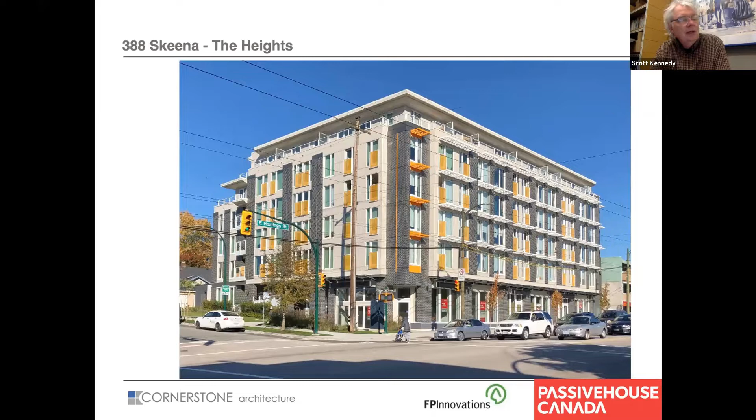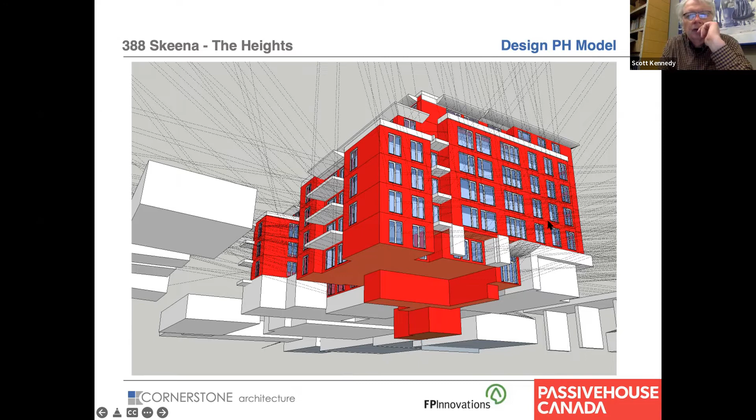So we did an energy model for this project based on a program called Design PH, which is a program developed by the Passive House Institute, and it feeds into a giant Excel spreadsheet, which is called the PHPP. So this model is done to help us enter the data and all the windows and everything else. And down at the bottom here, I think you can see that's the elevator as it goes down into the parkade. And those are all very difficult things to figure out how to deal with in terms of thermal bridging and other kind of modeling.

So what happens in a PHPP is you get this balanced equation for your energy. And so you have all the losses on the left, and you have all the basic gains in the building on the right. And the red is what you actually put in with your heating system. Now, typically in these multifamily buildings, you should be able to get that below 15. This is at 7, or 8 or so, which is really amazing, to tell you the truth.

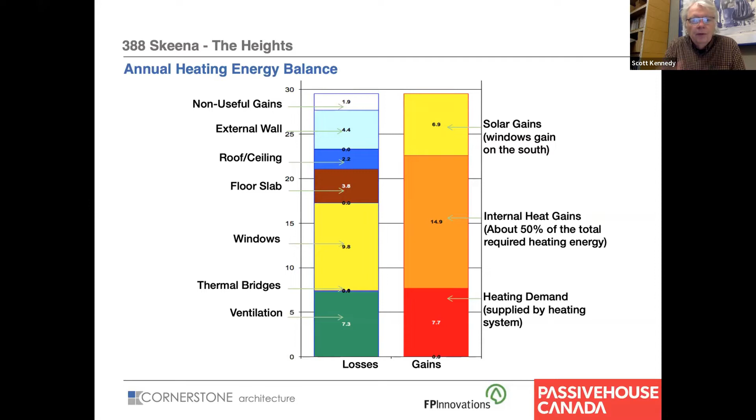And it's because it was our first building, we probably over insulated this building, and we relied too much on solar heat gain. So those are the 2 takeaways from our very first attempt on the building. But you can see that the windows are the biggest loss, and the ventilation is also a significant loss. We had detailed the building quite well, so thermal bridging wasn't a big deal. And then the walls and the roofs and other elements that were in there.

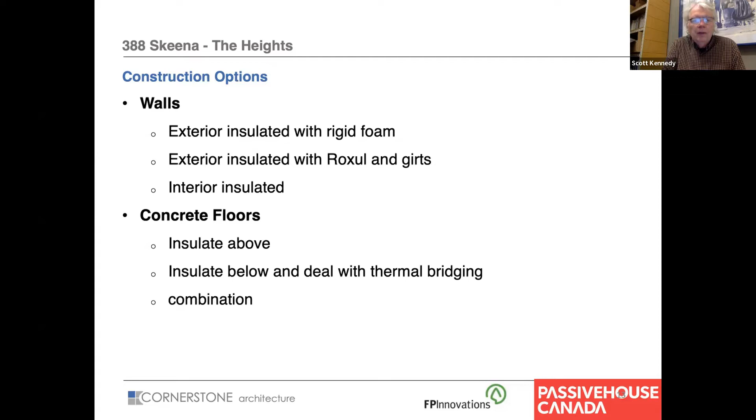So just some envelope details. We looked at the idea of insulating on the exterior. We looked at the idea of insulating on the interior. And we also looked at whether we would do the concrete floors at the base above or below. And we've concluded, I think as we move along, that exterior insulated with Roxul is the very best way. And certainly for using concrete floors, I think a combination of above and below is the very best way to deal with thermal bridging.

So these were the wall options we looked at. Exterior insulated, various options. We ended up doing interior insulated, and that was for a bunch of reasons, but it was also the choice of the contractor at the time. And you can see we try to be very careful in where the air barrier is and how it's going to work around windows and all those kinds of elements. And so there are advantages and there are disadvantages for each type of system that one might use.

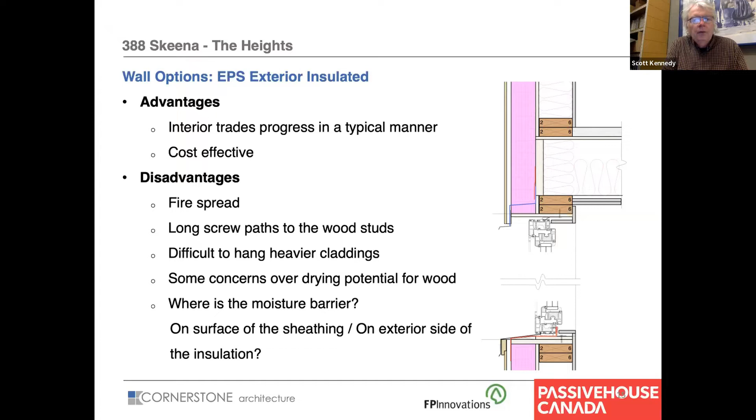And I think things are changing. Embodied carbon is becoming an important piece, and other issues become more and more important as we move through a changing world. So we looked at all these different options, and we came up with advantages and disadvantages of each one. And anyways, we ended up with this one, which was an interior insulated building. We've done 4 or 5 buildings this way now.

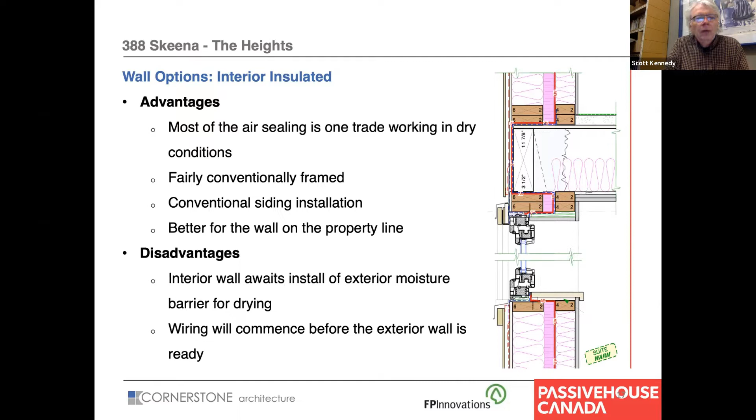There are advantages and there are disadvantages to every single way one would do a building like this. We actually built some models of this to help us understand how it would work and help the trades understand how we were going to put this building together.

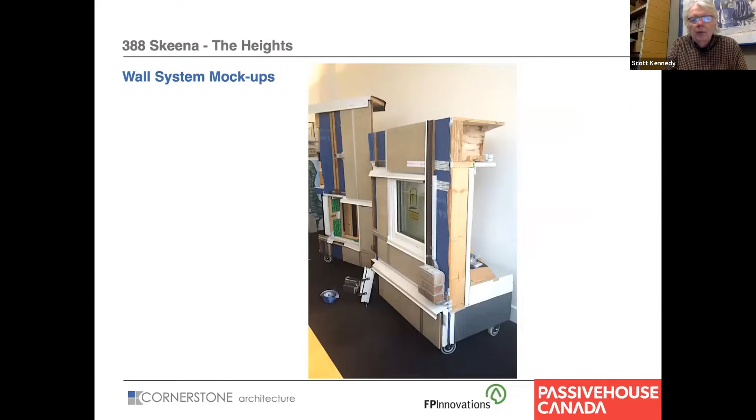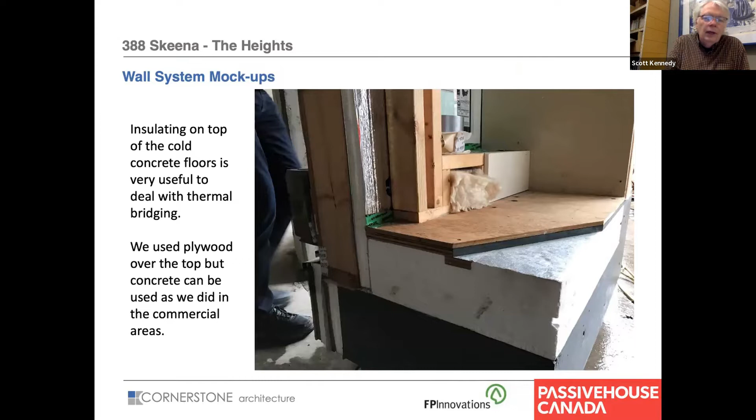You can see this one is actually insulated on top of the concrete slab. So we did that because it really is helpful for thermal bridging. And so this is how we did this particular building. So here's how we built the walls. You'll see that that interior wall is kept back from the exterior wall, which is one most unusual little detail.

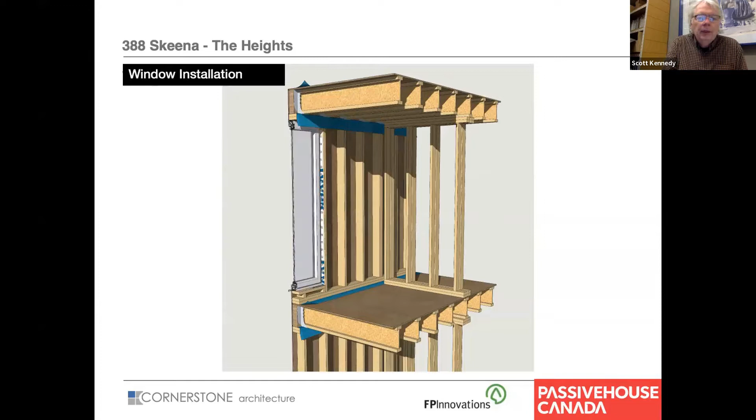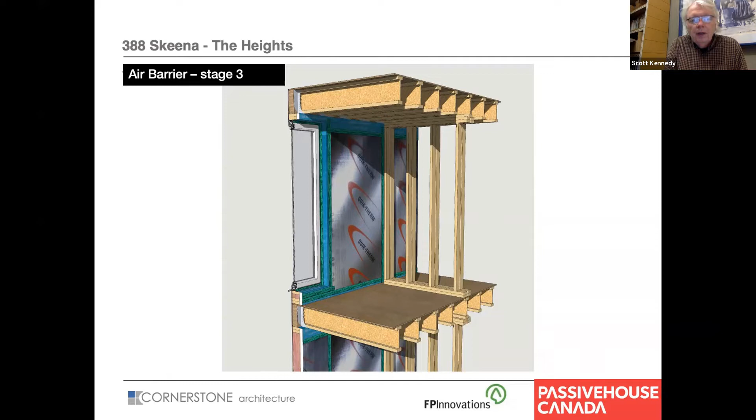We then lapped our air barrier material up the walls as we built the building, installed the windows. We then insulated the outer cavity. We then installed an EPS foam with a film on it, and we tape sealed all that. That's an expensive tape we use too. It's an acrylic seal type adhesive on the tape. It's designed to last 100 years. Once you put that on, you'll not get it off, but it's expensive, 69, 70 cents a foot.

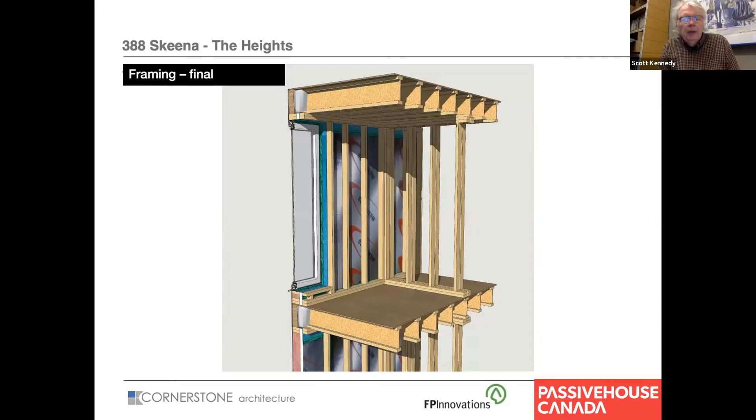We then furred in a service cavity wall on the inside of that. That's so that you don't pierce your air barrier with any of the plugs and all the other services that one would put in. And then we finally insulated the project.

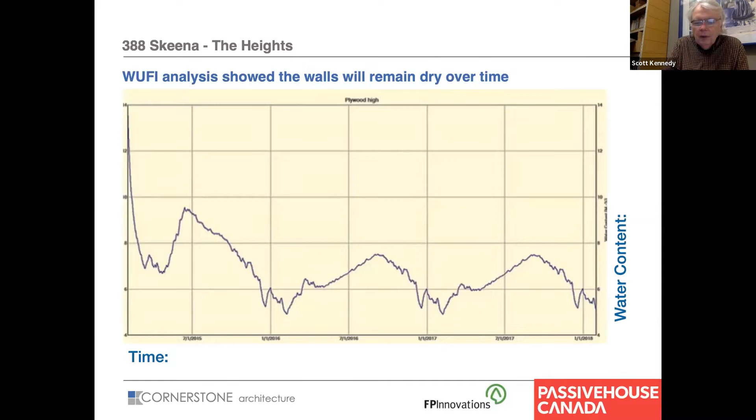So as part of what we wanted to make sure that that wall was going to be okay, particularly on that outside of the plywood, we did have all of our leaky condo syndrome. So we actually ran a little WUFI analysis. Our building envelope consultants actually ran that, and they felt that the moisture content varies through the season, but it always stayed well within what we were hoping to do.

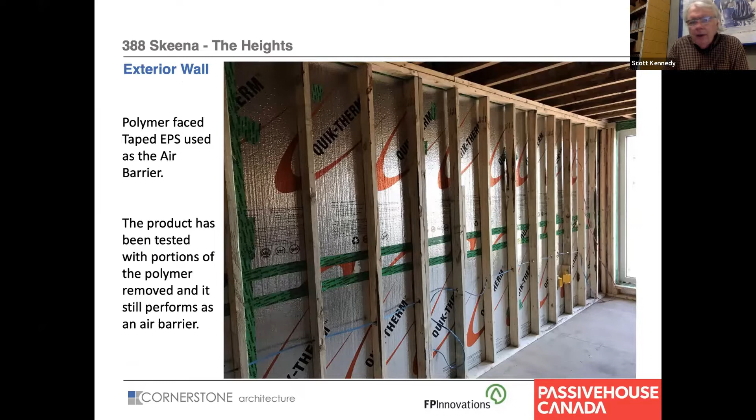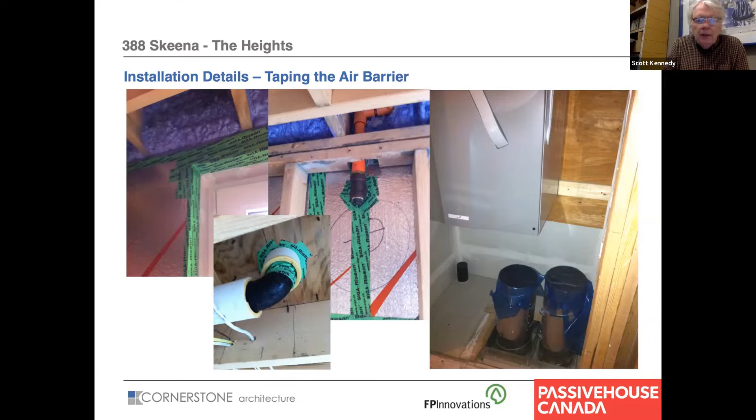Here's that service cavity wall showing all the various services that go in there. But again, we've got this continuous air barrier taped behind it. And then there are some beautiful things that happened. There are some special details we came up with for how we could put sprinklers in and eliminate drops, and a lot of air sealing things that one has to do when one does a project like this.

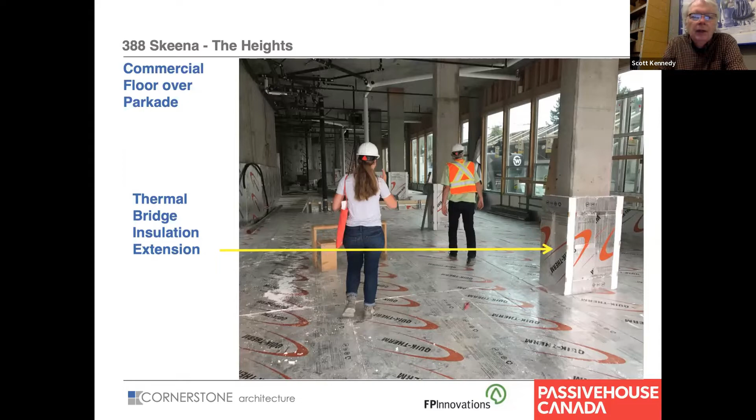And that's the main floor. And you'll also see that, again, to deal with thermal bridging, we had a concrete column that goes through the floor and comes up into the building. We actually decided to over insulate them on top. Again, I think we overdid it in this building. I don't think you need to be quite as aggressive, but this is our first building of this type that we'd ever done. So that's kind of how we ended up there.

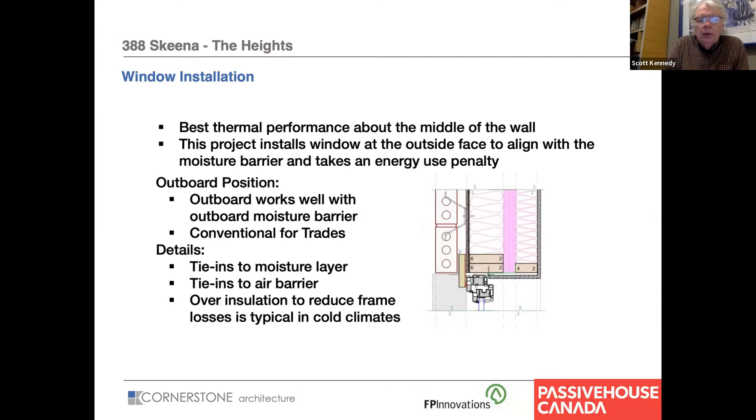And then we made some decisions about how to install a window. We did it outboard. We set the face of the window flush to the siding. We did that for a bunch of reasons, but the biggest one was it just was simpler to do, less tie-ins for the contractor to do. It's not necessarily the very best place to put it from a thermal viewpoint. At those windows, what you really want is those therm lines to be quite straight, and you can see that they bend quite a bit because we're outboard with that window. But there are practical reasons we wanted to do that.

And one of the reasons was you see that big step on the inside of those windows. Sometimes those go out to balconies, and it became a step to go out to the balconies, which was quite useful.

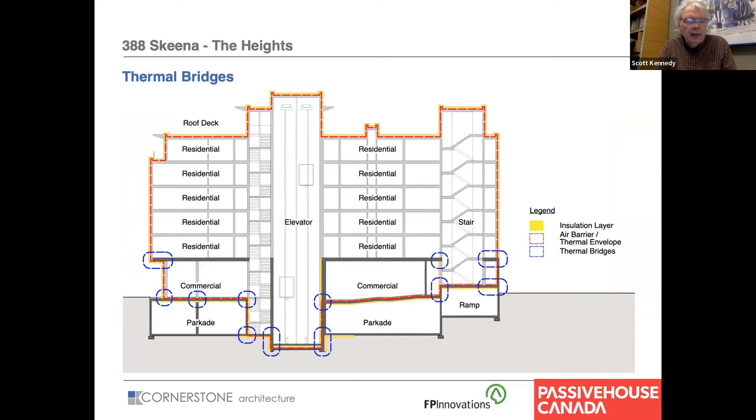And then there's lots of thermal bridging issues that one has to deal with, particularly at the ground floor, where you've got these concrete slabs that go inside to outside. And how do you stop the thermal movement? One of the beautiful products out there is the Isokorb system, which actually provides a structural thermal break in a slab. Really difficult to get engineers to spec that here, but this is a picture of the one I saw.

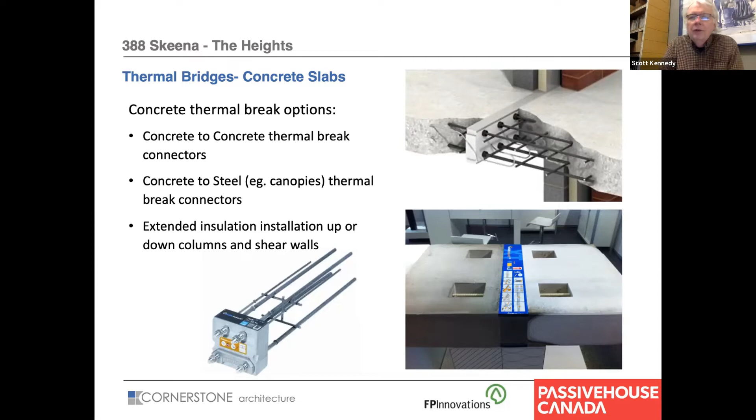I think it was in Germany. I took this picture where you can see it's freezing on the outside and it's warm on the inside, and this does a marvelous job of a thermal break. But they're not common here. We are starting to see them. They're very expensive. So we had some thermal bridging problems ourselves where we didn't want to translate the cold steel up into that warm slab.

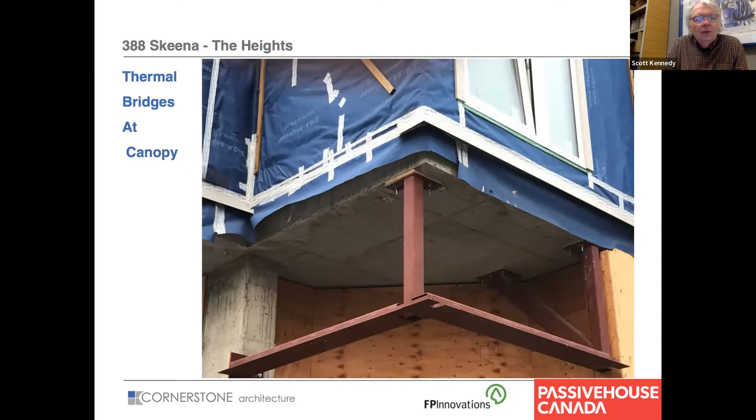Ultimately, that slab's warm in this building. And so what we did is we just used a wood block. It's a real simple, cheap way to do it. So again, this is our first time through it, and we were working out all of these various details and how we would make this easy for the builder to build, and we worked with the builder quite a bit to do it.

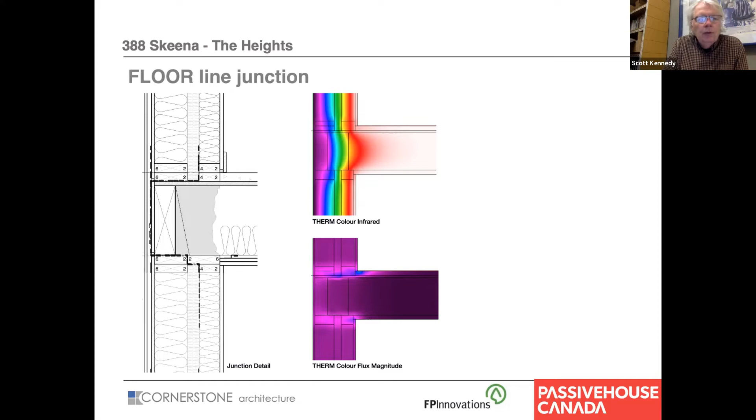We did a lot of thermal modeling of the joint junctions just to see how they worked. In this particular case, we have spray foam at the floor lines. That was to improve the thermal insulation. Also, it's a vapor impermeable layer. We were a little worried about condensation, maybe on that cold wood beam. I'm not sure if I'd worry about that today or not. Those are all things that we were worried about.

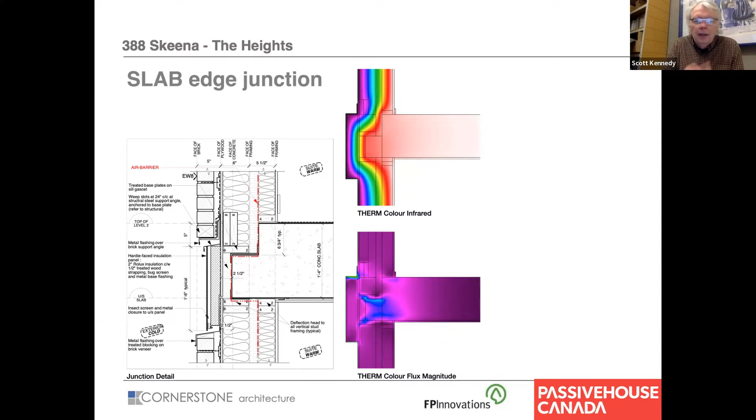There was obviously a problem at the slab. You'll see there's an interesting detail where we stepped the edge of the slab. It's quite a thick slab, but we stepped it. The reason we did that, there's those two 2x8 blocks that you see there. That's actually so that we could attach brick angles to the building, and so that we could attach handrails to the building and not have a thermal bridge. So that's kind of the thinking that we were doing as we tried to make that work out.

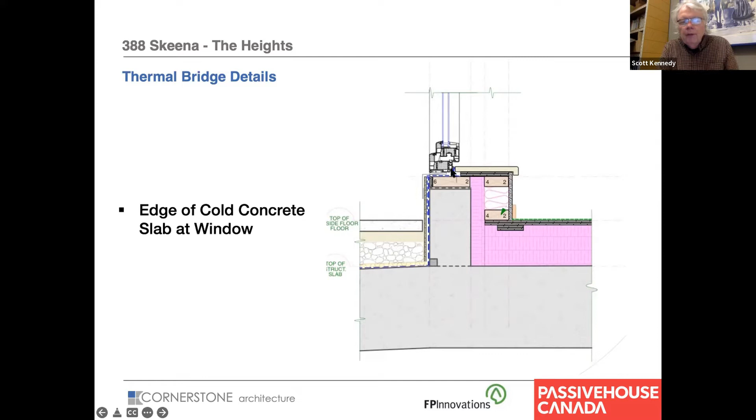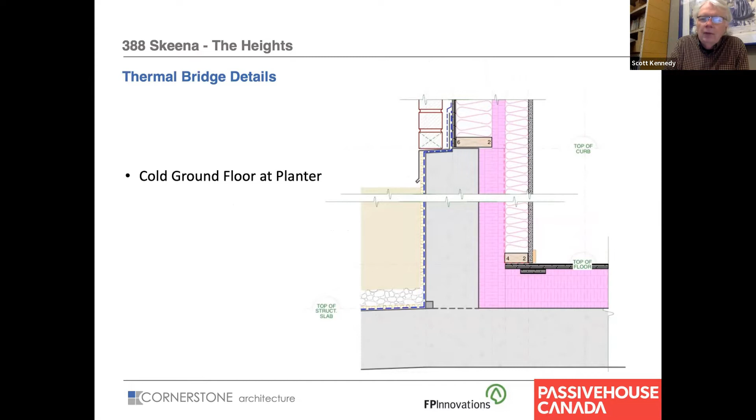Here's basically a typical detail at the exterior wall. We have a little bit of a concrete curb there because we don't want to have a waterproofing problem. You'll see a little detail there in the corner. This is basically a water stop product that's in there to give us a secondary barrier, although we're bringing our waterproofing membrane up and into the sill, which is kind of a common practice here in BC. And then sometimes we had this similar detail, but where the brick was, and we had some upstand walls. So again, all these details were fairly carefully considered as we went through the building.

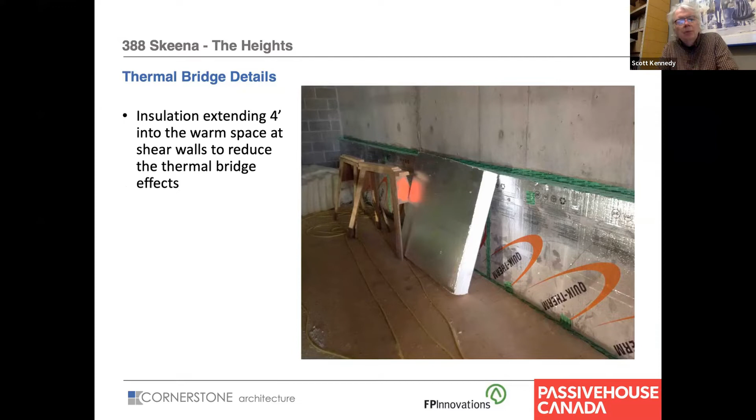That would be an Isokorb if you could do it. It turns out we couldn't in this particular building, but we ended up top insulating and bottom insulating the slab to deal with that detail. Again, we have shear walls going through the building, so we brought them up the top. You could bring them down the bottom into the parkade too, but we brought them up the top into the commercial space to deal with the thermal bridging.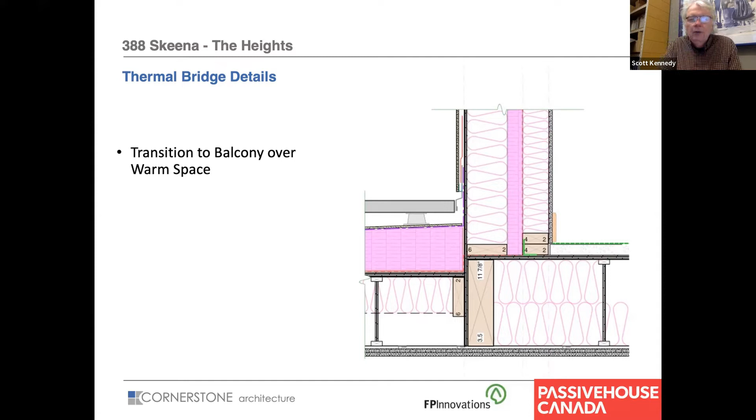There's a typical detail at the deck, and this is something that we'll talk a little bit about as we move along to some other assemblies, but this little detail here, not wanting to get condensation on that plywood and having your waterproof membranes go in here, that's really your vapor layer. And how much insulation can you put below before you create a condensation problem? We're actually finding we can fill it. As long as we put enough insulation on top, we can fill it, and we do have some data where we actually measured it on this building. I'll get to that a little later.

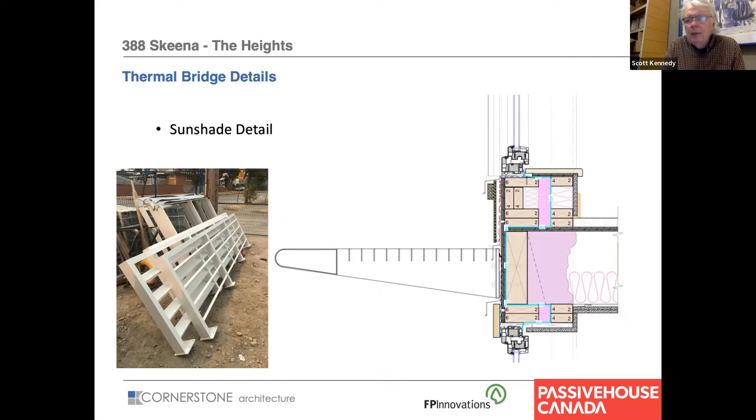Again, the beautiful thing about having the structure on the outside, it made it very easy to attach anything to the outside of the building. So we made judgment calls, and these are why we did it. There are other firms and other projects where we're making different decisions, but these are the decisions we made for this particular building. And you can see the sunshades going up. Now, these sunshades are not large enough. I can tell you that right now.

And we also have a problem with urban heat island effect and climate data that's really outdated. It's not dealing with the future. And we are getting overheating in this building. But those are things we can talk a little bit about as we get to the end.

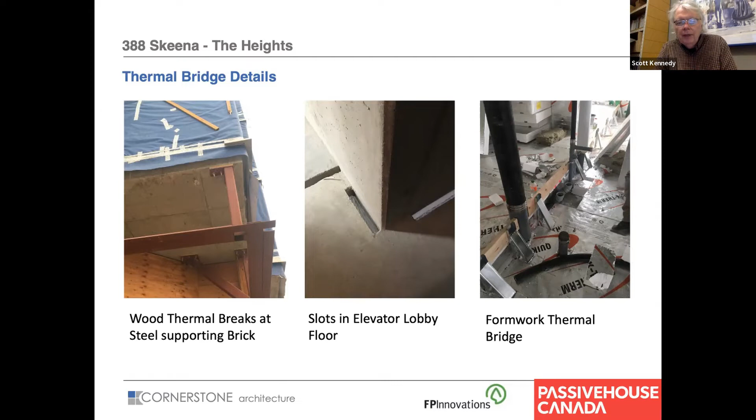These little slots you see here, that was our idea. This is down in the parkade, down at the elevator lobby. And we needed to have a little bit of a structural connection, but we didn't need to have the whole slab go through. So what we did is we left slots. And in those slots, we stuffed mineral wool insulation with a fire stopping product in order to deal with the thermal bridging. So those are just some of the thinking we did. So it's not perfect, but it goes a long ways to helping your energy model.

Now, anytime you're doing buildings now in BC, you're going to be having to do an air tightness test. This building turned out to be amazingly tight for its size and its complexity. And so the Passive House standard is 0.6 air changes an hour. This one hit 0.29. And basically, you could use a blower door that you would normally use on a single family house to do an 85 suite apartment building.

So it's very tight. And again, it really relies on having, in my mind, trades that are educated to what the objectives are, and to really pay attention to the air barrier continuity details. And that's really, really important. And so, a good test, the single family house in Vancouver is 3.5 air changes an hour, and they get them tightened up to maybe 1. So you can see that the Passive House standard is very, very important.

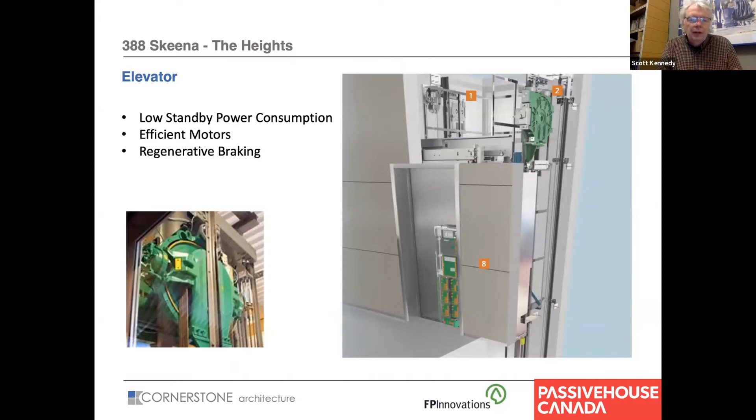So there are other parts of a building that are important too, right? So the elevators are quite a high consumption item. We specified these new elevators. They're not hydraulic. They actually have motors that run with the car up and down. And at 6-story height, they'll actually put some regenerative braking back on these things. So in fact, they will start to generate energy back when they're trying to slow down. So these are all just interesting pieces.

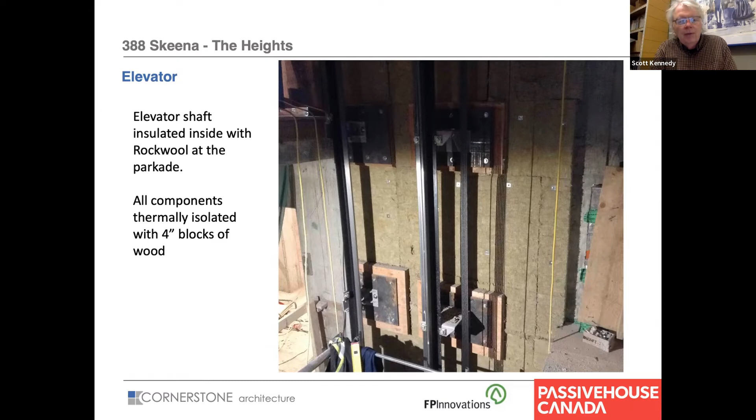Now, from a building envelope point of view, the weird part of this thing is there's really no vapor control. And so if we had a lot of moisture, technically it might condense on the concrete behind this. But again, the rock wool is not going to deteriorate. And the parkade actually stays warmer than you think. So we're pretty confident it was going to work. So it hasn't proved to be an issue.

So the way we ventilated the building at the time, we decided to go with these units, which are Zehnder ComfoAir 550. They're highly efficient units, about 90% heat recovery efficiency. They're basically something you'd use in a house. But because they were small apartments, we put 5 apartments on these units at the same time. And you want those outside ducts to be as short as possible because they're basically bringing cold air into your building, and you basically had to insulate that duct. So we wanted to keep them as short as possible. We put them on the roof.

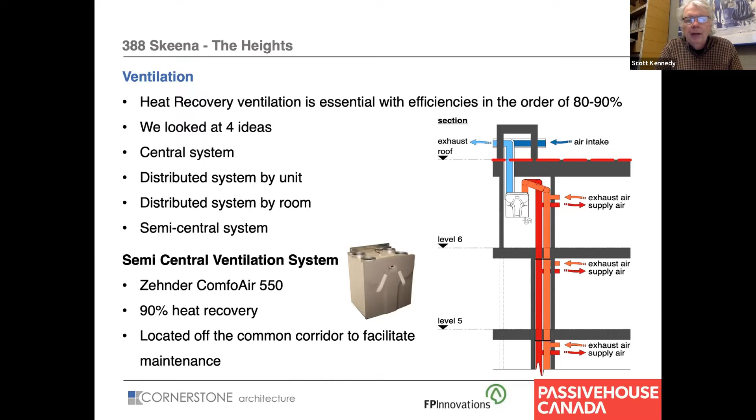Good for the winter, good for the short ducts, bad for taking in fresh air in the summer that's overheated from the roof. The urban heat island, as we talked about. So there are issues that were good and bad about the way we did it. They work quite well, and they certainly provide great air quality in the building. But you see all these. This is the 6th floor. There's just a whole bunch of closets on the 6th floor that we put these units in, and we did that so they're very easy to service.

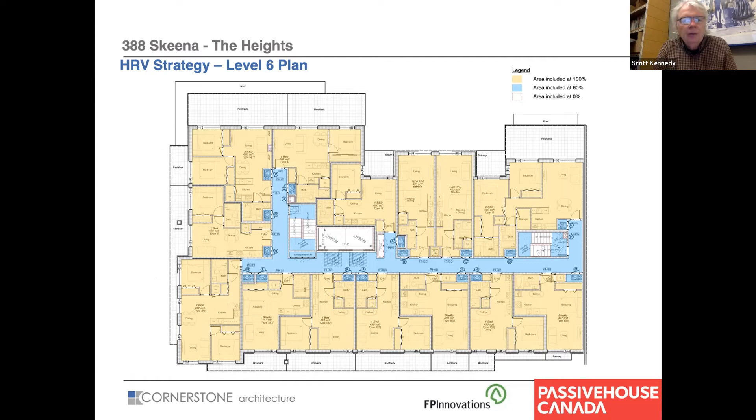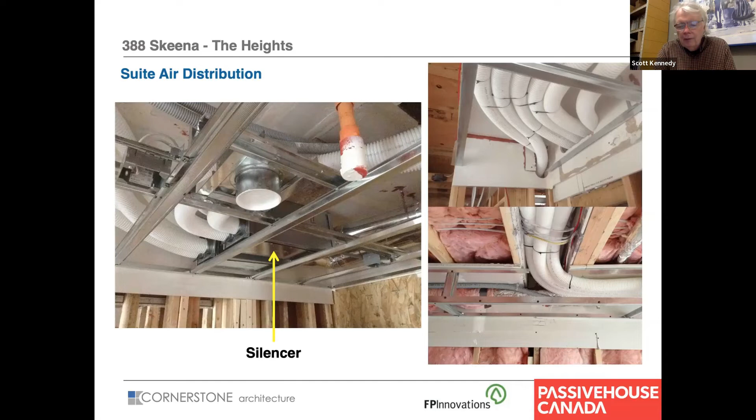And the reason for that is this silencer box that you see here. That takes the noise that's coming into the suite and puts a silencer, and then it pipes this air very quietly. You do not know what's going on in the suite. And the other piece of that ventilation is each suite has a button in the bathroom and a button in the kitchen. And if you hit it, it'll actually increase the volume of air for the whole stack of 5 suites. So we're ventilating 5 suites at the same time with 1 unit.

It was inexpensive. It gave reasonably good controls. And that was the reason we did it. I mean, again, this is our first shot at it. Just trying to get a client to even do it takes a bit of work, right? But we did get a client to do it. In fact, we're building a townhouse project with the same builder and the same clients right now. That's a passive house building.

So the other piece that's really important in a multifamily is hot water. Hot water is a very, very large user of energy in a multifamily. And one of the keys is you're always circulating hot water around the building. And all that hot water line is radiating heat into your building. And I know you've probably been in the hallway of an old building that is totally overheated because the water lines are running through there and circulating hot water.

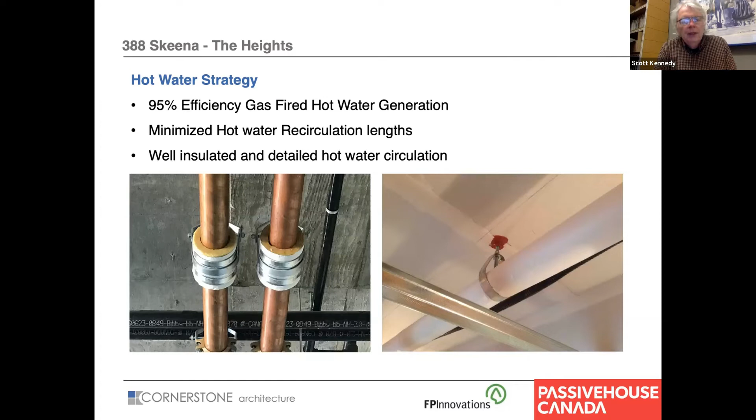So the key here is you want to increase the insulation on these hot water lines. You want to make sure that when you connect them, you're connecting them thermal bridge free as much as possible. There's always a few seismic braces that you can't do that with, but for the most part, you can hang them. And so you want to really detail them well. And this is that hot water line as it comes up to the manifold, up into the unit. Once the water's into the unit, we don't worry about it in the passive house.

The other thing that we learned, and this came up very late because there was a translation issue between what they call a downpipe and what turns out to be a vent. So this is the fact that plumbing vents coming through the building often bring cold air up into your building and up the pipes and out the roof, and they actually cool your building down. And so we found that out right at the last minute. So we had to run some insulation very quickly onto those plumbing vents. So that got taped on really at the end.

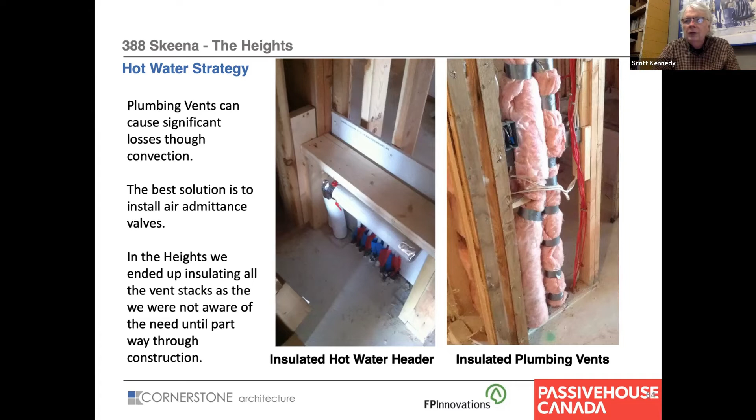We're now starting to use air admittance valves. So what we do is put a valve at the top. The city's allowing us to do this now on the very top of the stack outside. And what happens is it allows air in, but it doesn't allow air out. So we don't get that convection loss through the pipes. So the building actually has a hot water system using gas, but this is what we're doing now. So lessons learned and technology in the market.

Now, in terms of appliances, we're using heat pump dryers. So we're no longer taking interior air, heating it up, taking some moisture out of your clothes, and then throwing it outside. We're actually recirculating the air. We're basically using a heat pump to take the moisture out of the clothes and put it down the drain. It's supposed to be easier on your clothes. It is slower to dry, and the technology is very old in the European market, very new in the North American market. And the drying time is where we're stumbling the most with our clients on that.

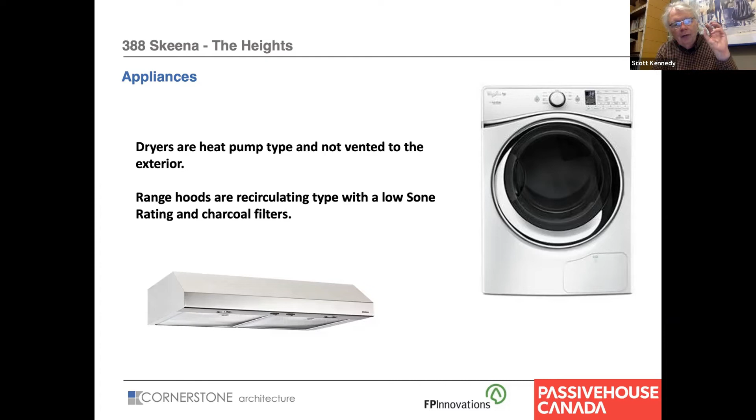And the other thing that is important in a passive house is that they want you to use those hood fans, but they've got to be quiet or nobody uses them. So again, we use recirculating fans with charcoal filters, but then of course our heat recovery ventilator has a vent usually in the kitchen. So 24/7, we're actually taking the air out of the building.

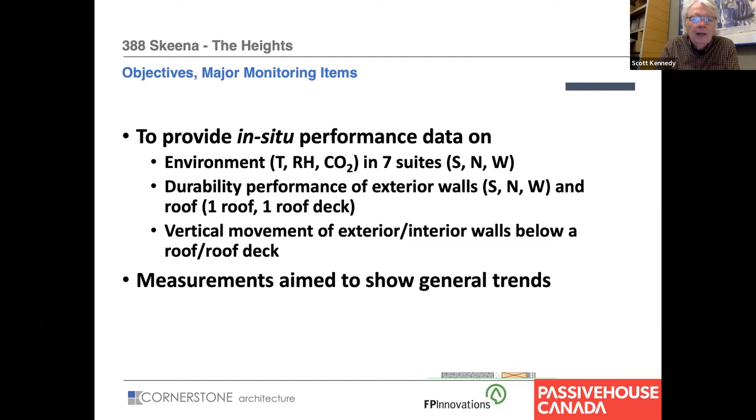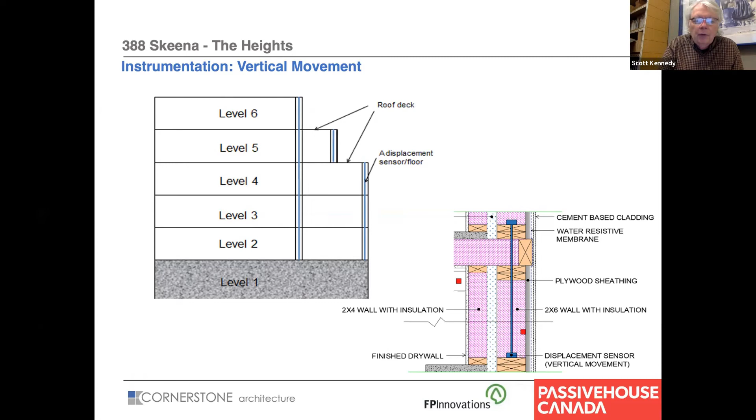So we actually had a little bit of ability to do some monitoring on this building. There were some instruments put in looking for durability and performance and condensation and some vertical movement ideas. And so this is some of the data we got. I haven't updated it for quite a while since I did this presentation, but this is kind of what we did. We measured the shrinkage of the building. We measured the effects on the roof decks of that plywood, whether that plywood was going to get any condensation on it. And we looked at the indoor temperatures.

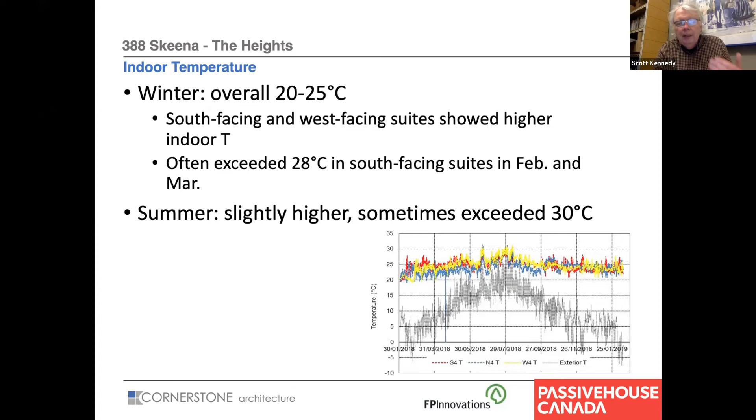This was our problem with the building, right? We found that the building overheats. It uses very, very little heating energy, and it does overheat. So we're working on another building about a block and a half from there that's under construction now. On that one, we're putting exterior shading on the south, and we are going to cool the supply air, so as that fresh air comes in, we will be able to put a little bit of cooling in. We think that'll be good, until we get real massive climate change. Then that might not be enough, but we think it'll look after us for quite a while into the future.

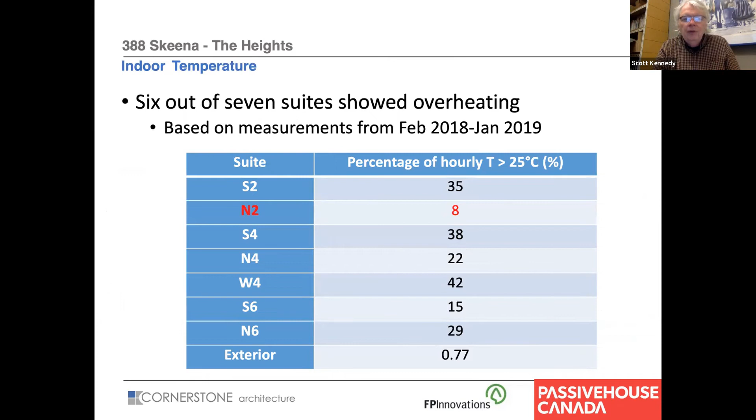So, in the energy modeling we didn't see the overheating, and the building is actually a certified passive house, but in reality we did see it. I think urban heat island effect, maybe not as good shading as we should have done on the windows, definitely too high a solar heat gain on the glass. These are all mistakes we made, but live and learn, that's why we do these things. So this is what we found out, that we did see overheating, particularly in the summer.

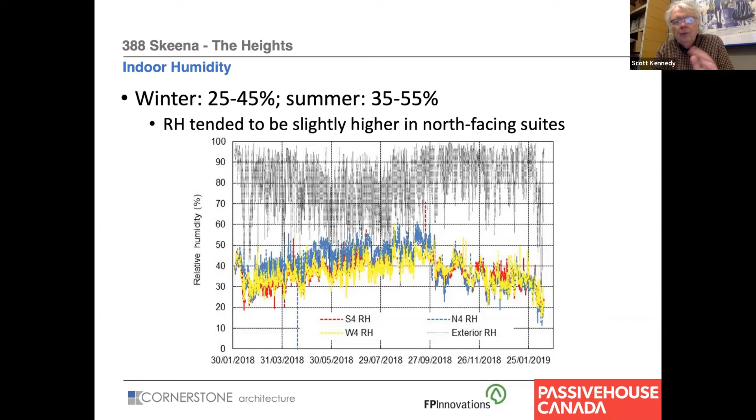What we did find is that humidity control was pretty good in the building with the continuous ventilation. No real concerns with humidity control. The odd time we got the odd spike, but generally pretty good, and those spikes tended to disappear right away. So the ventilation system is dealing with humidity quite well.

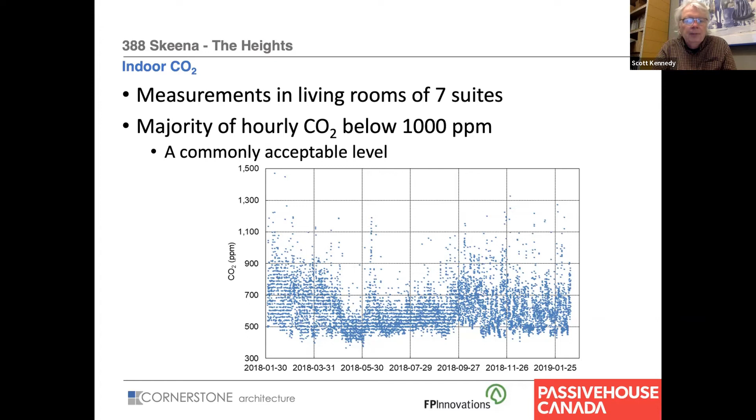And we looked at monitoring CO2 in the suites. Again, CO2, you want to keep it below 1,000. The natural environment is around 400 these days outside. So this is a plot of where we saw that number. It occasionally got up there a little bit, but that's probably somebody having a party or something else going on. But generally it was working quite well.

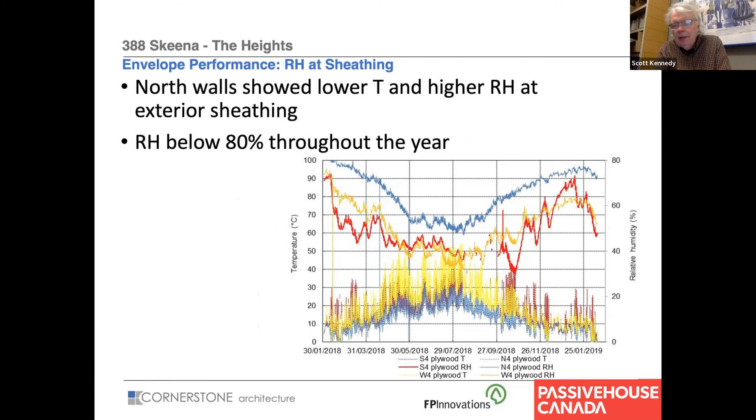Now this is that envelope performance with the relative humidity at that sheathing. Remember that sheathing's on the outside edge. And so generally, we were in a range that everybody was fairly comfortable with in terms of the actual moisture content on the sheathing. But it does occasionally get up there a little bit, and again, it dries out. So there haven't been any noticeable issues at this point in time. And once we got through the second winter, it was a lot better.

So once it dried out, it actually improved quite a bit. So we got to the point where we're pretty confident that there's a short period of time where it's a little bit high, but it tends to be better and better as we move through.

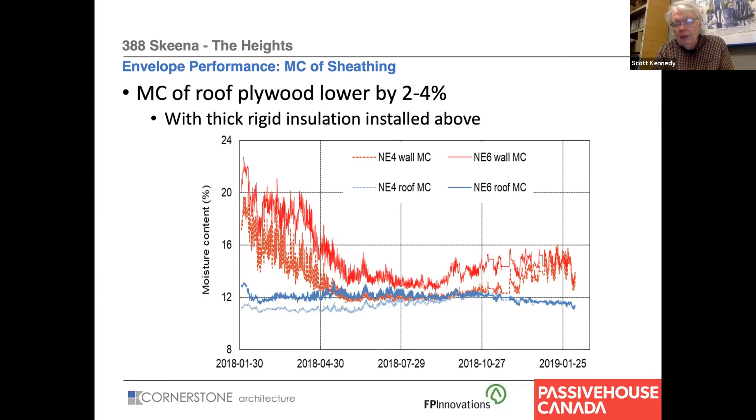And insulating on top is really the key. And remember, this is open to the night sky, so this gets really, really cold temperatures at night.

We're doing a building right now with a bunch of exterior decks, and they're on posts. And so we know the building's going to shrink. The question is, how much shorter do we have to make the posts on every floor so that the balcony always slopes to drain and doesn't backslope into the building? And we're picking about 3/8 of an inch per floor. And again, it depends on the material and the moisture and when it's built. There are so many things that come up, but these are all important things.

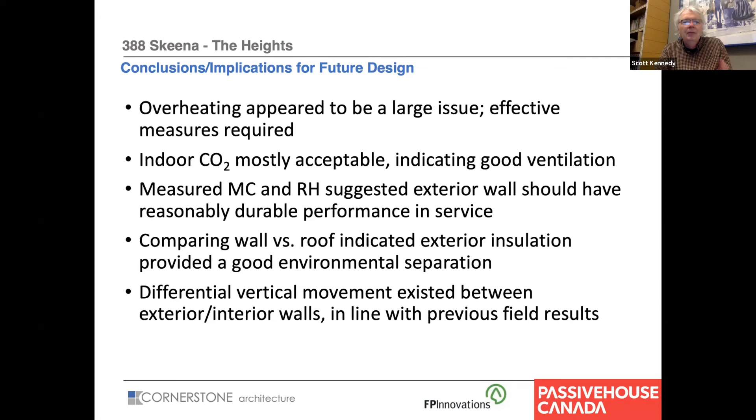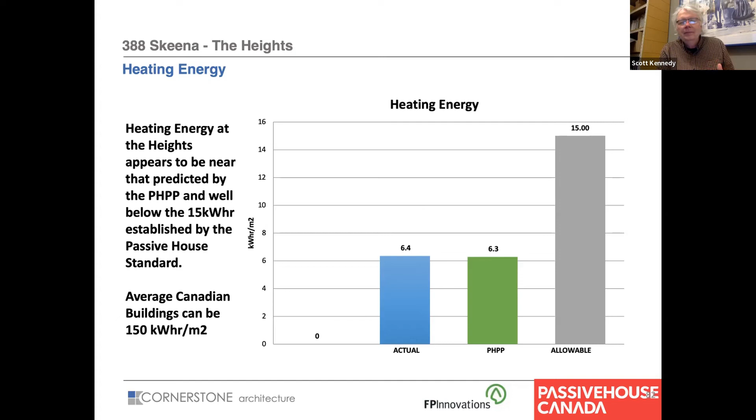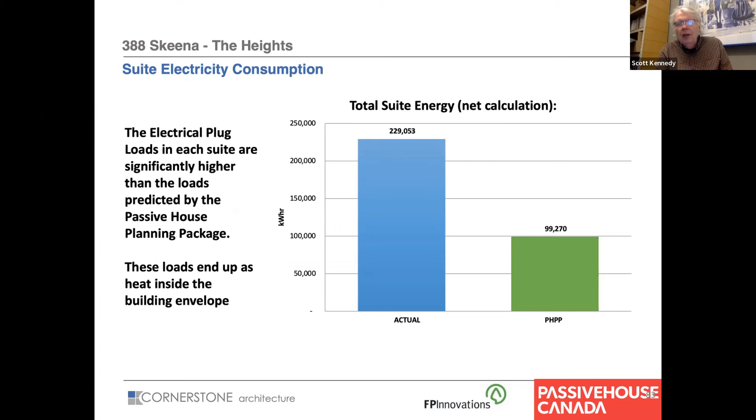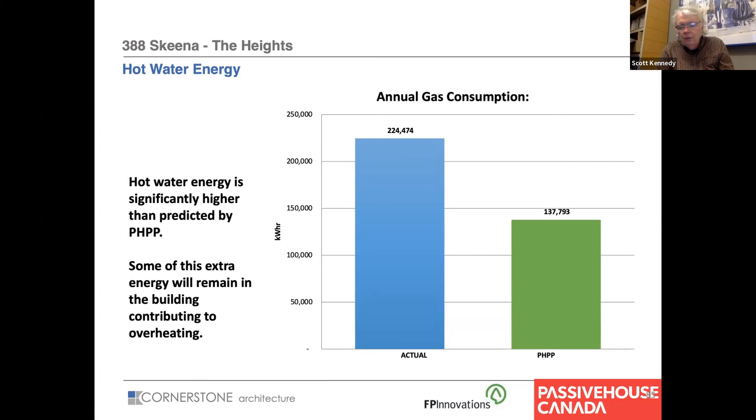So then we looked at annual gas consumption. And again, more hot water seems to be used in this building. Now this is a bit of an estimate, so it's not terribly accurate, but based on data we got from our mechanical consultant on water flow and how much was hot water, there was quite a bit more gas consumption making hot water, which is all gas is used for in this building, than we would have expected from PHPP.

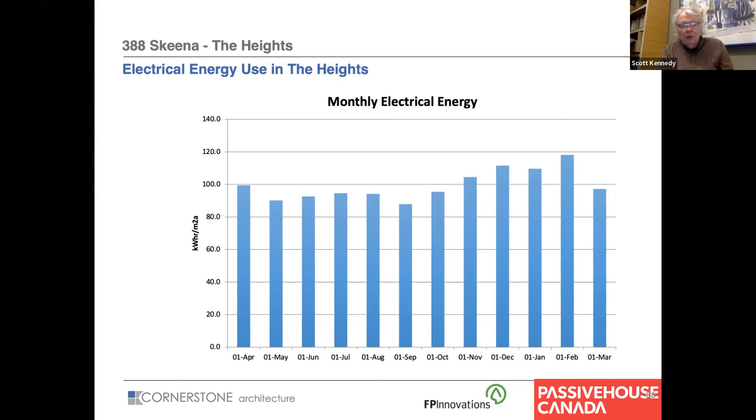And with the monthly electrical energy use in the building, you can see that it doesn't vary that much from winter to summer. That's because there are so many fixed loads in a building like this, and we're not using much energy for heat. We have very, very low heating energy in this building. I should have had a slide of what a typical building would look like, but you see the heating is almost a non-issue in this building. It's really the gas consumption for hot water production. That's the biggest piece.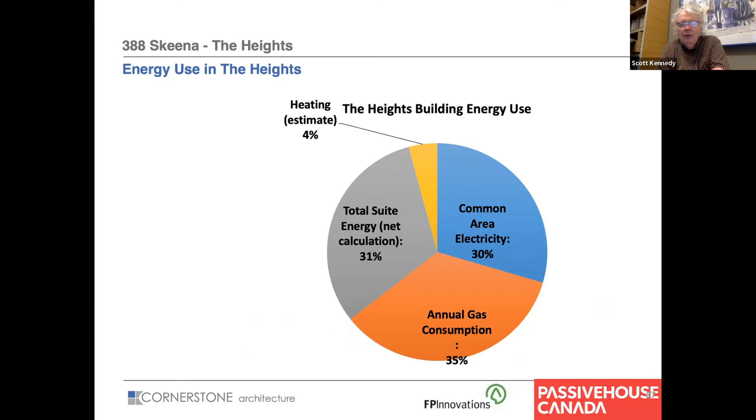And then what people are using in their suites. But we've cut the heating energy way, way down. Now, if we changed to those Sanden heat pumps to create our hot water energy, this is what this would look like in terms of percentages. And so this is kind of what's interesting about the building.

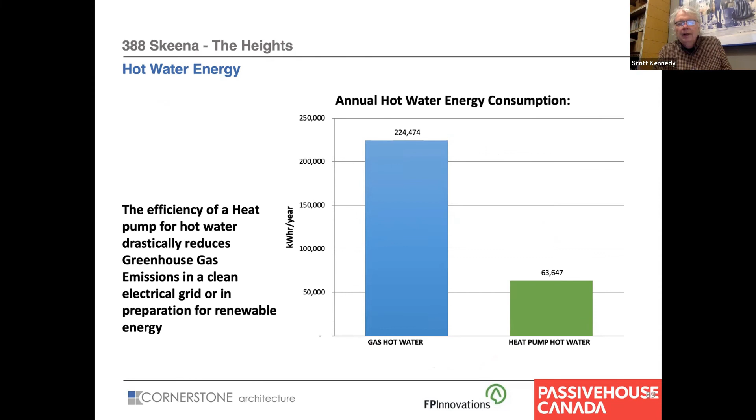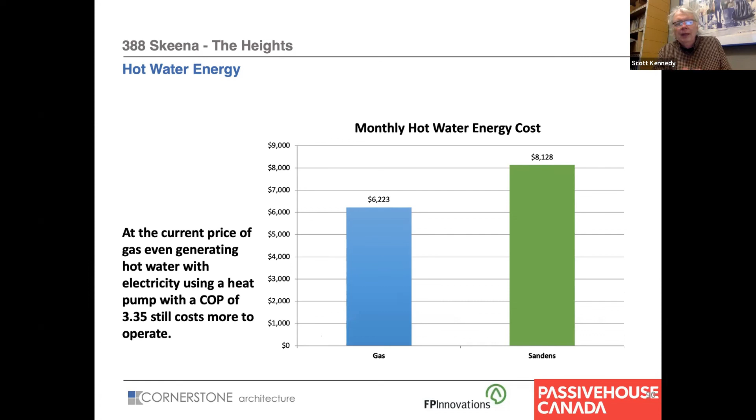And we then looked at, okay, how much energy is being used by the gas to make hot water. If we turn it to a heat pump, because they have a much higher COP, gas might be 80, 85, 90% efficient, whereas a heat pump is going to be maybe 2.5 to 4 times as efficient, depending on COP. Depends a little bit on outside air temperature. But even when we did that, it still costs a little bit more under current conditions to run the electricity. Not significant. And as our carbon taxes catch up and as the gas price goes up, this will change quite a bit. And so I think it is the right way to go.

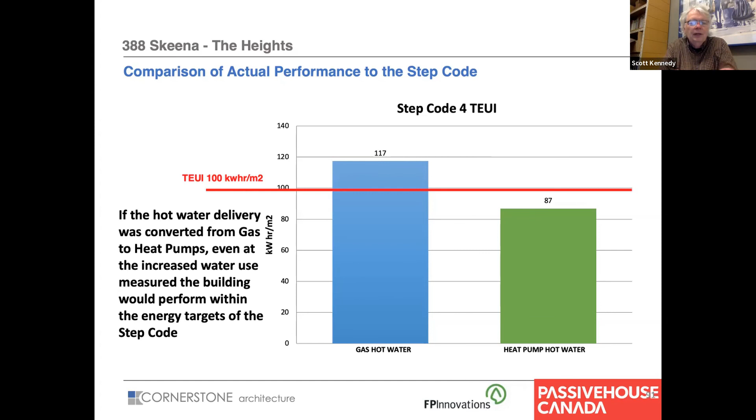We thought we'd compare this building to the total energy use intensity, which is part of the STEP code, the highest level of the STEP code. If we change the gas to heat pump hot water, we would actually be under it. So that was kind of interesting. And this is performance measured. So in fact, the building would have gotten there.

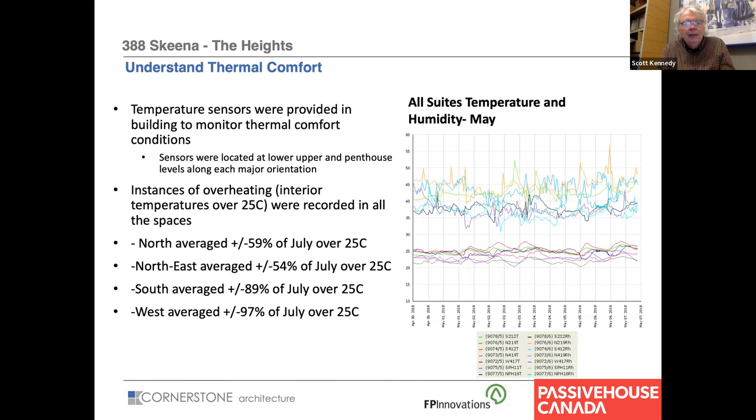So this was this whole thermal comfort problem we were dealing with. And humidity again wasn't too bad, but thermal comfort, we did find that we were getting some overall overheating in those summer months. And this is kind of important to figure out. We've got to think about this moving forward, particularly with that heat dome that happened last summer.

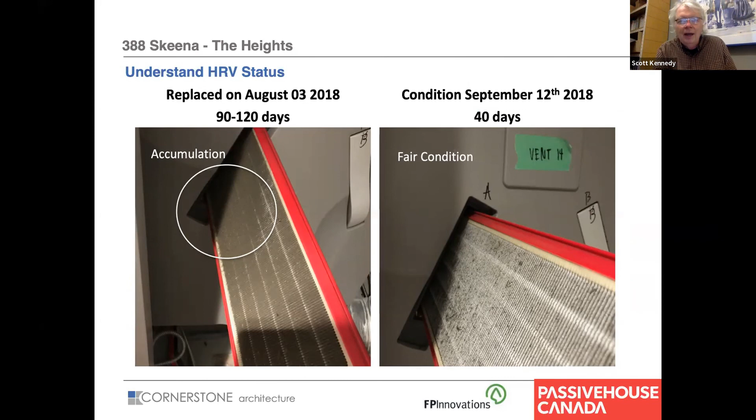In this case, you open a door, you pull out the filters, you put new filters in, and you're done. But if you got to get up on a ladder and move a ceiling tile and undo a screw to put a filter in, it ain't going to happen. So I think that as a design moving forward, we got to really be thinking about these things as we go.

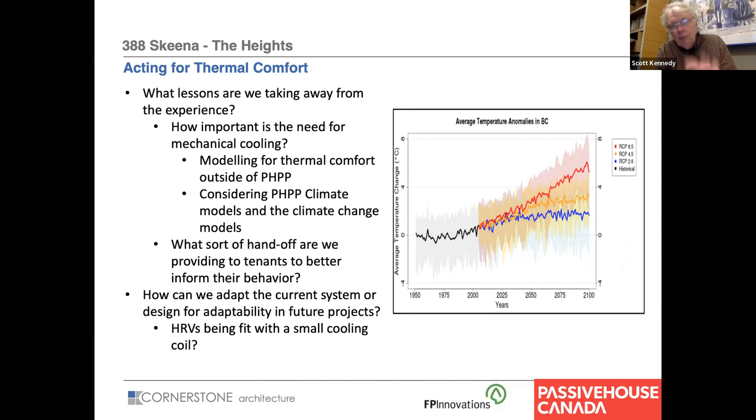And so this is just this idea of climate change and what's going to happen and how we're going to figure out moving forward how we're going to deal with overheating in our buildings. I don't think heating's our problem anymore, especially in a multi. It is going to be overheating in these multis. We can insulate for our thermal comfort, and we should insulate for our thermal comfort. So anyways, this is kind of where we think we ended up.

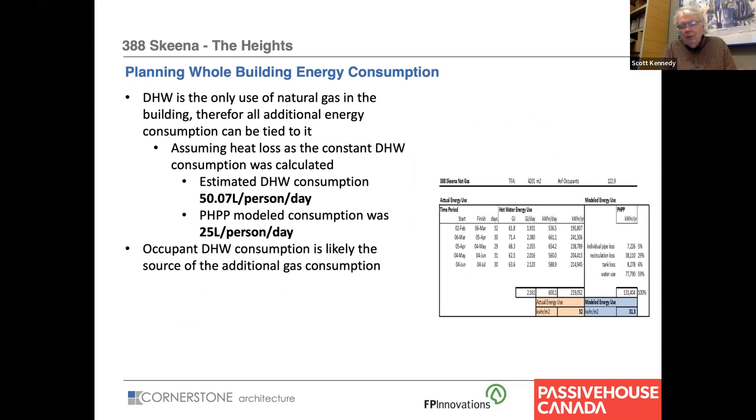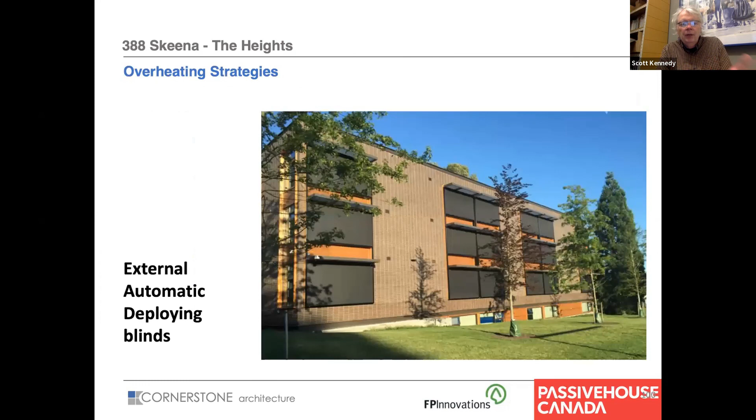This is just a couple of slides that were kind of at the end, but these are options for how to deal with overheating, whether you shade your windows properly, whether you put exterior shutters on. There are some grids you can put on, screens you can put on that actually allow you to see through, but actually take care of the overheating.

This is the building that's under construction about a block away right now. It's at the slab level right now. And on this one, we put exterior blinds on, and we put some cooling in the supply system. So in this case, we've got 2 bigger units on the roof, and they have a cooling and heating coil in the supply line that then puts the ventilation down into the suites. This is how we've done it.

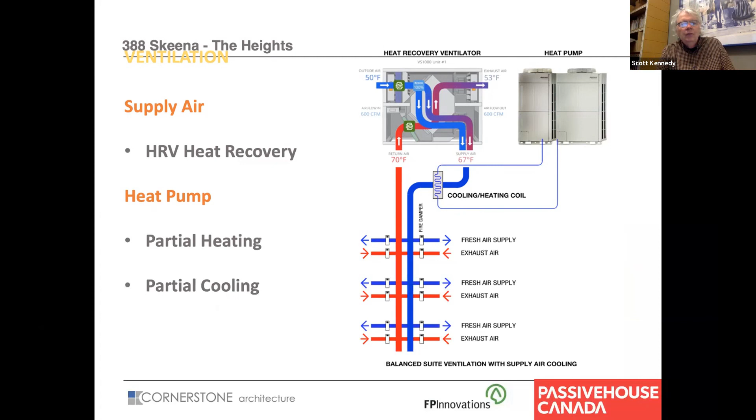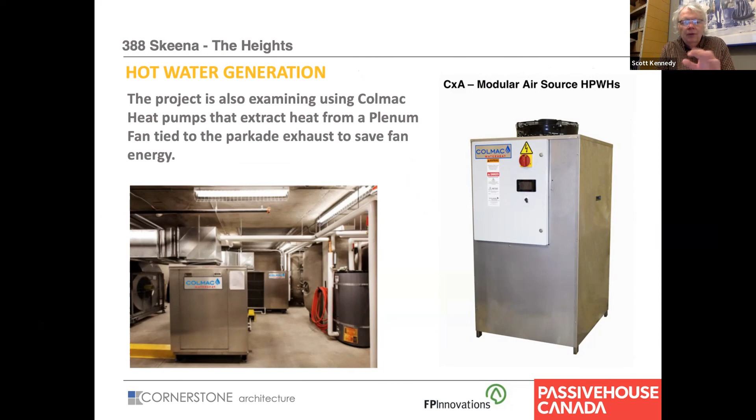We were going to generate with these big Colmacs, but after a cost-saving exercise, we are now using the Sandens, which is what I wanted to use in the first place. The engineers wanted to use these, but again, we're using the CO2-based heat pumps.

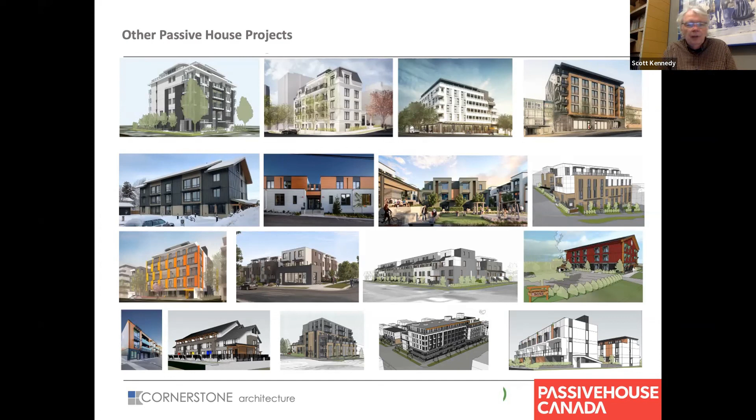These are all passive house projects that our office is working on. Some of them are built. This one is finished. This one is finished. This one is almost finished, and maybe we can do a tour. This one is under construction. And this one, I was just there yesterday. It's in Fort St. John, up in northern BC. So all these are projects that we're working on. Anyways, that's the presentation.